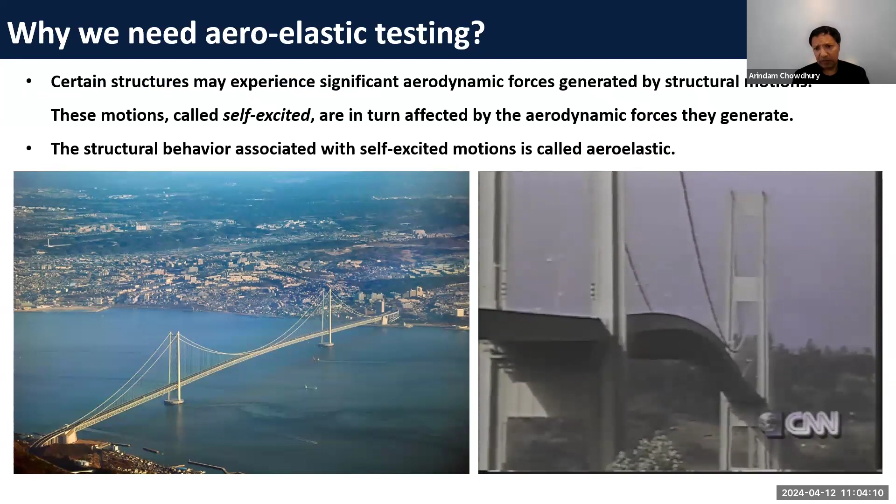My research started with bridge aeroelasticity, so it's relevant to long span bridges, and then the main impact was from the Tacoma Narrows Bridge that actually failed in the video that you can see here. So this failure of the Tacoma Narrows led to a lot of researchers working on bridge aeroelasticity, how the bridge vibrates in wind, and we can model in the wind tunnel test section various degrees of freedom of the bridge under wind loads, and these are some equations that apply to those motions.

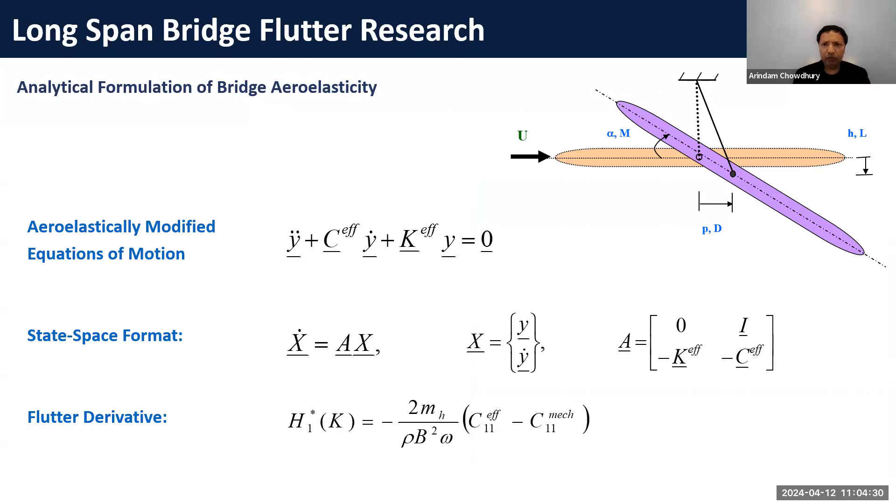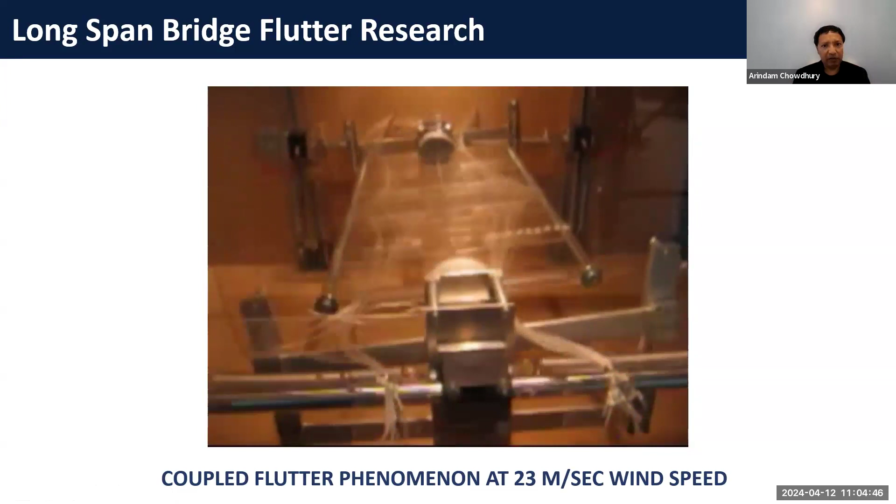From there, in the laboratory, my research was to simulate the actual flutter. As you can see, this is a coupled flutter of a section model of the bridge in the wind tunnel. And we came up with theories that long span bridges can be designed using. So that was my background. Then when I joined Florida International University, I started looking at full-scale and large-scale testing of other types of structures: buildings, bridges, traffic signals, transmission towers.

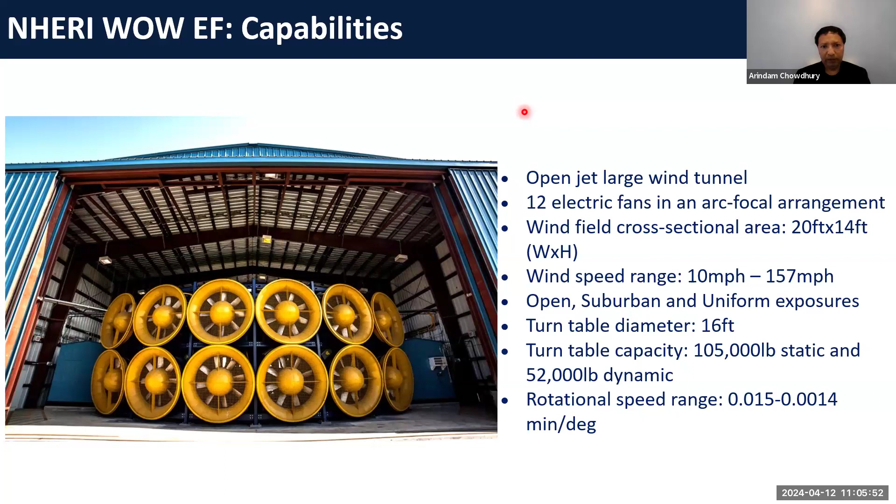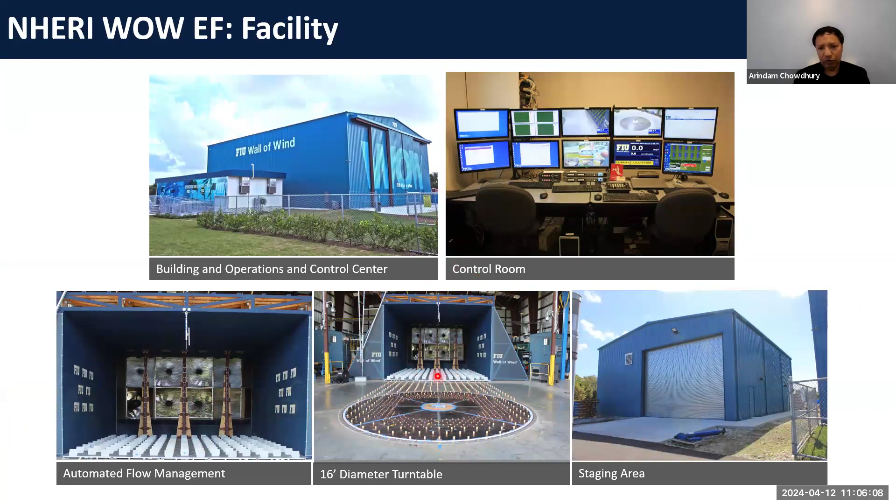And our unique capability is to produce category 5 hurricane wind speeds and test large scale models or even full scale models. So these are various parts of the wind tunnel. We have the control room. We have an atmospheric boundary layer simulation technique using automated roughness on the floor. We have a huge turntable, and we also have a staging area where we can build models. The uniqueness of our facility is that we can do large scale and full scale testing.

Let me see if I can move away from that particular view. I probably have to kind of... Bruno, can you still see my screen? Yes, I can see your screen.

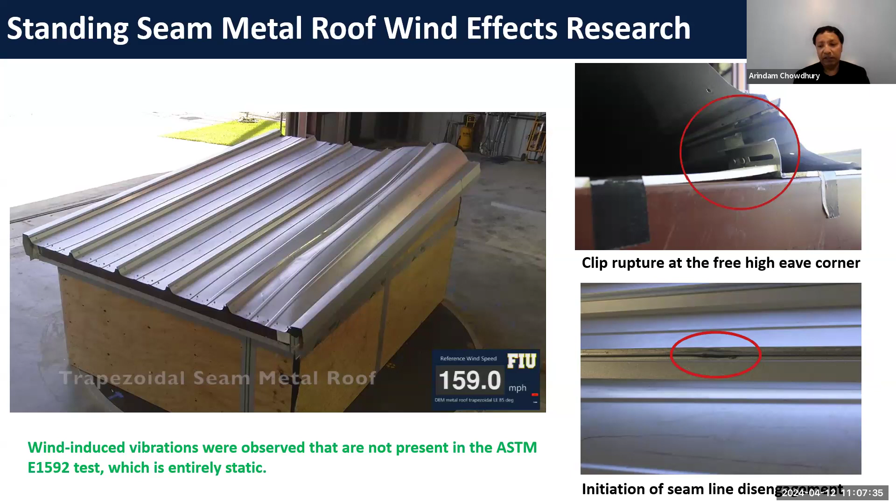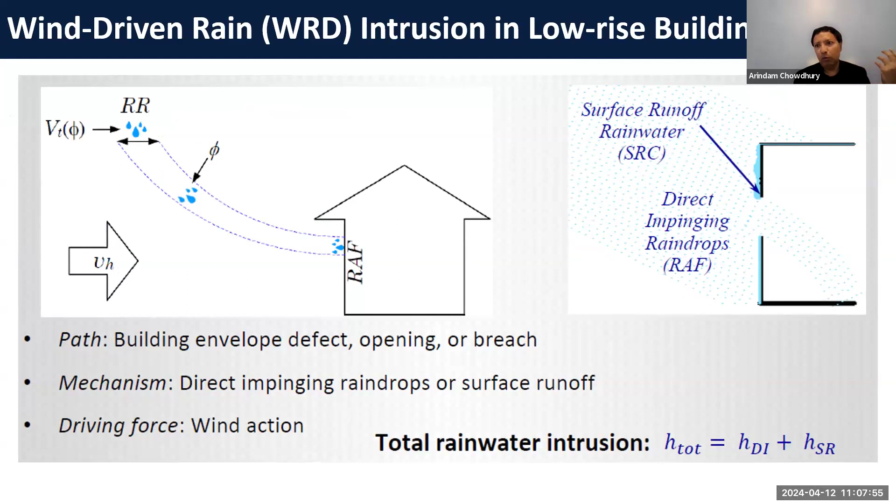So that's the advantage of the Wall of Wind, that we can look at failure modes. We can improve the design. We can also inform the current standards that can be improved using some of these findings. We also know that hurricanes bring a lot of wind-driven rain. And the wind-driven rain has two ways of getting into the building: the direct rain coming, as you can see on the left-hand picture, and then surface runoff, which percolates from the roof or the wall and goes inside a crack or an opening.

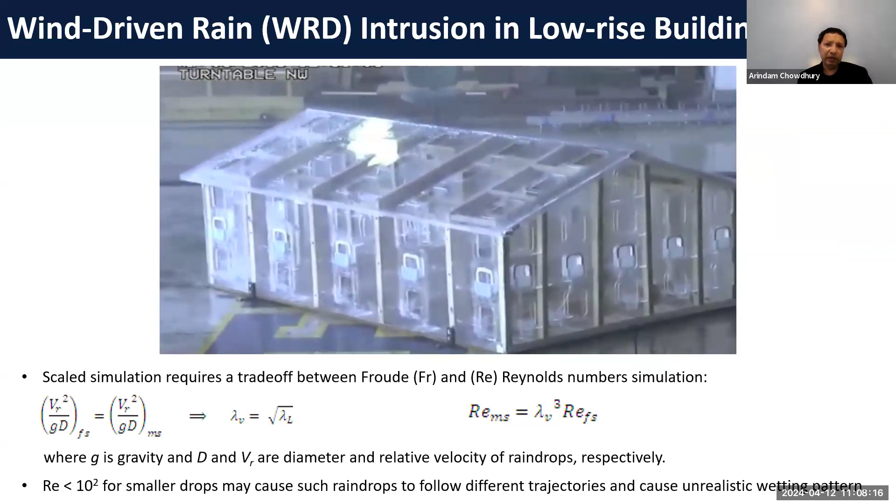So we can simulate all of that at the wall of wind. So this is a simulation of rain on a large-scale model. One of my PhD students graduated with this particular topic, looking at how to scale down rain based on realistic rain measurements in the hurricanes and look at water intrusion. When we get such data, we can come up with various rain intrusion coefficients on the building.

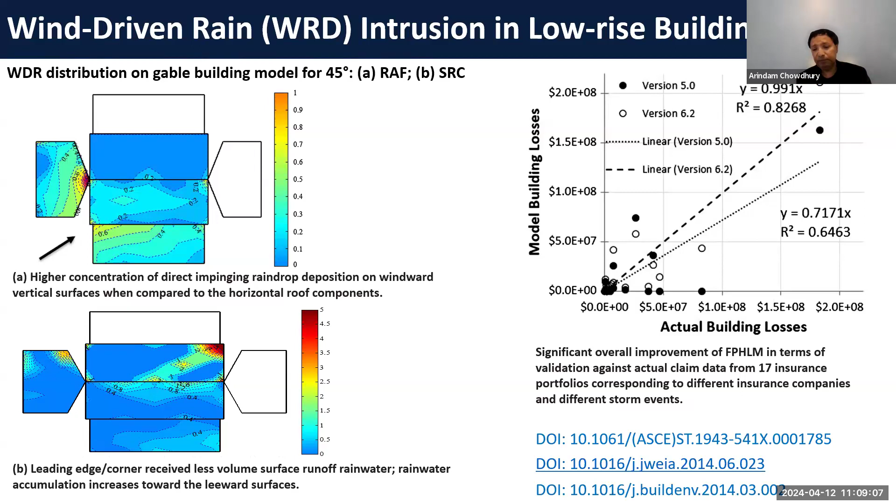And on the right-hand side graph, it shows how using the wall of wind data, there was a significant improvement in matching the simulated risks with the actual losses that they see from the claims. So this was a significant improvement that we did based on testing. There are other things that can be done as well.

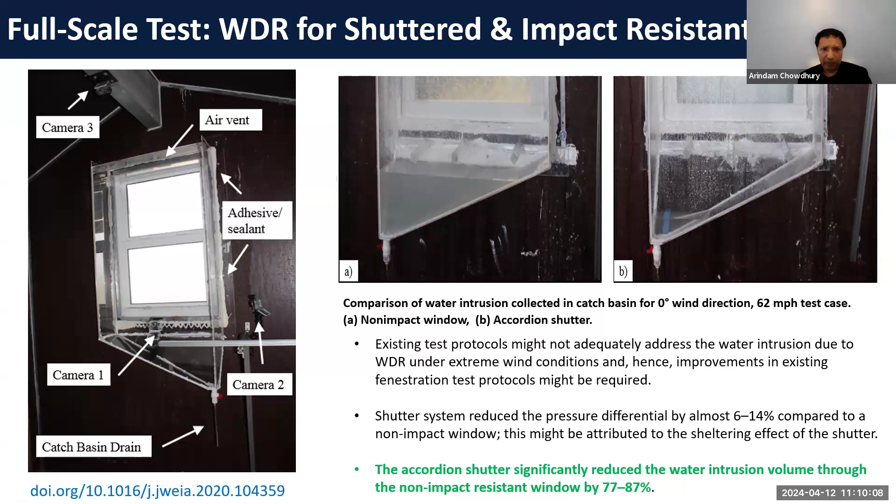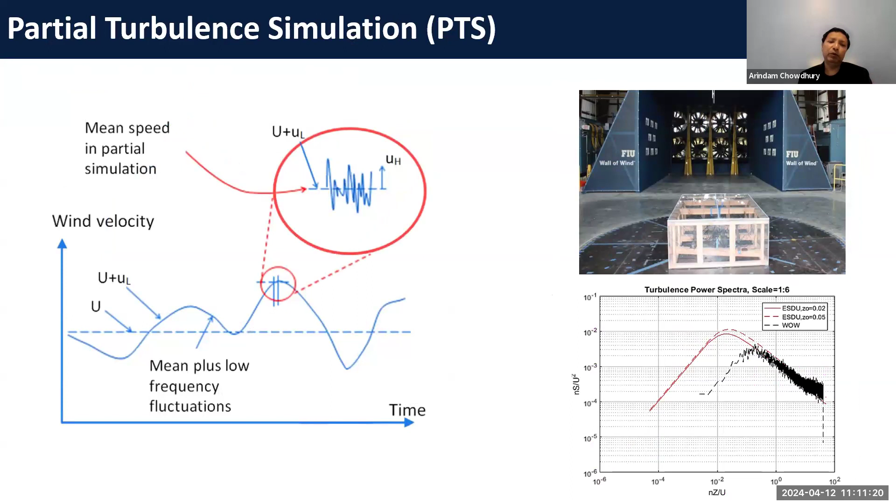So we came up with a method where we can test a larger scale building at the wall of wind and still get good results. It's based on what we call a partial turbulence simulation, and it deals with a lot of statistics. But it can predict pressures that are accurate and very close to the field.

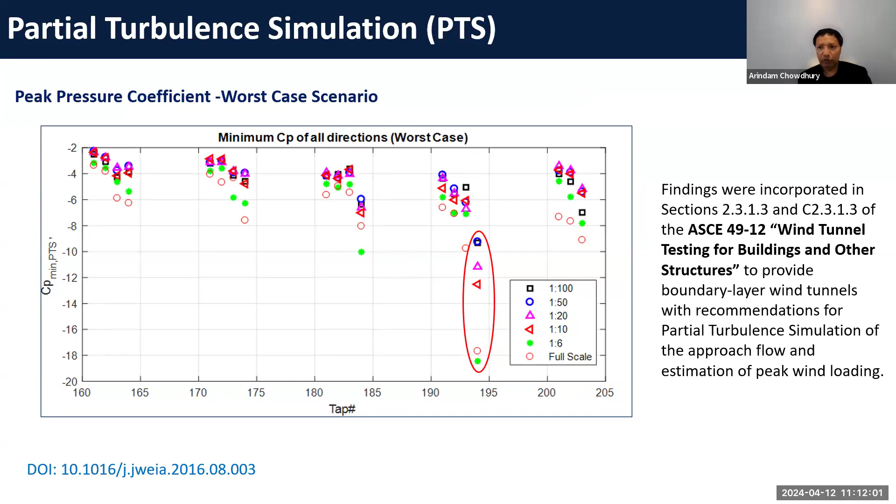And this partial turbulence simulation method went into ASCE 49-12, which is the wind tunnel testing for buildings and other structures. So they have a provision there that calls for such simulation for large scale testing. Once we have these kinds of test methods available, you can do a lot of things.

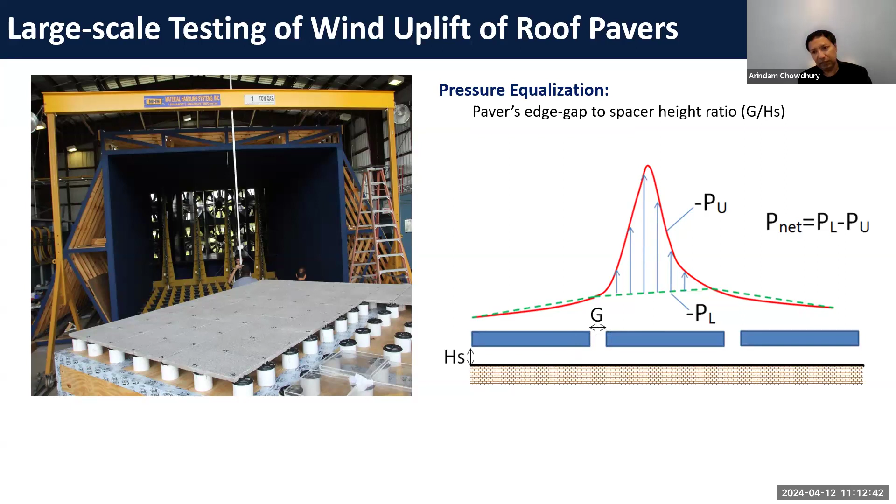For example, this is an example of roof pavers on the roof. These are actual concrete pavers. And you can appreciate that there is a gap between the pavers, and also a gap underneath the pavers. The gap between the pavers on the right picture is called G, and the gap with the roof surface is H. So the ratio G/H determines how the pressures are equalized between the upper surface and the lower surface, and how the vortices behave.

So we plotted various pressure diagrams using the entire paver roof. And we made recommendations that as you increase the G/H ratio, you have less net wind uplift on these pavers. That means your failure wind speed is higher. So we put these recommendations in ASCE 7-22 and ANSI/SPRI RP-4, which has guidelines for pavers.

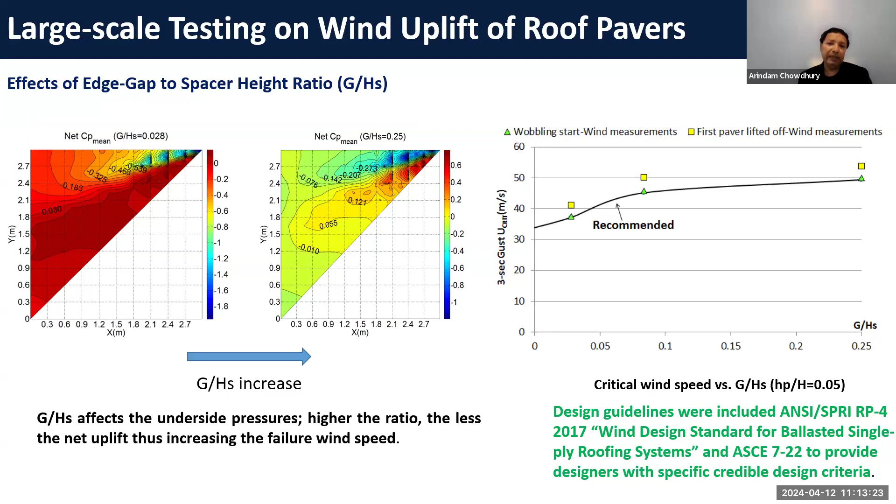But we can see from these kinds of tests that the failure modes can be very different. So we understand the failure mechanisms when we look at this kind of testing. Again, this is an advantage of the Wall of Wind.

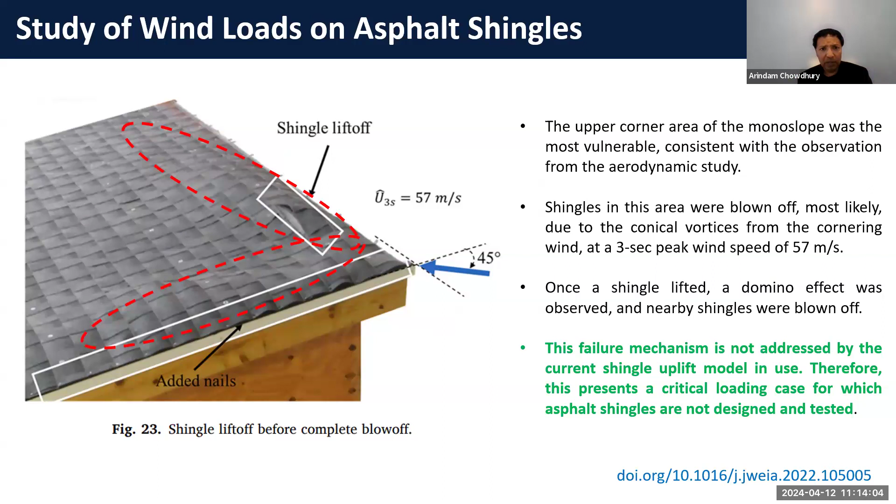But with the smoke, you don't have much flow characterization, but you can have a lot better flow characterization with the actual velocity field on a spatiotemporal scale using the PIV. So any of you who have requirements of understanding fluid-structure interaction and fundamental fluid mechanics can come to our facility and use PIV.

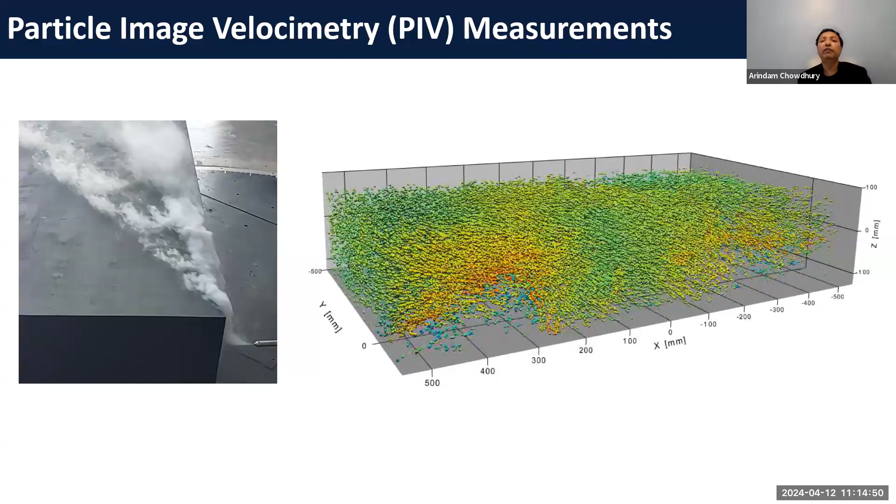At the same time, it's producing wind energy that the building can use during power outages that we have seen in hurricanes. We have seen it in Hurricane Wilma and even Hurricane Irma. So if we can produce power from these things, we can power a house during these power outages.

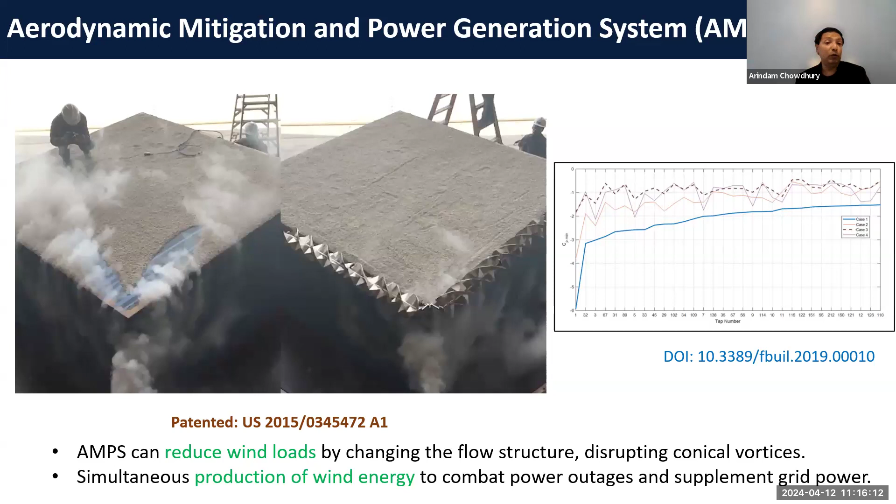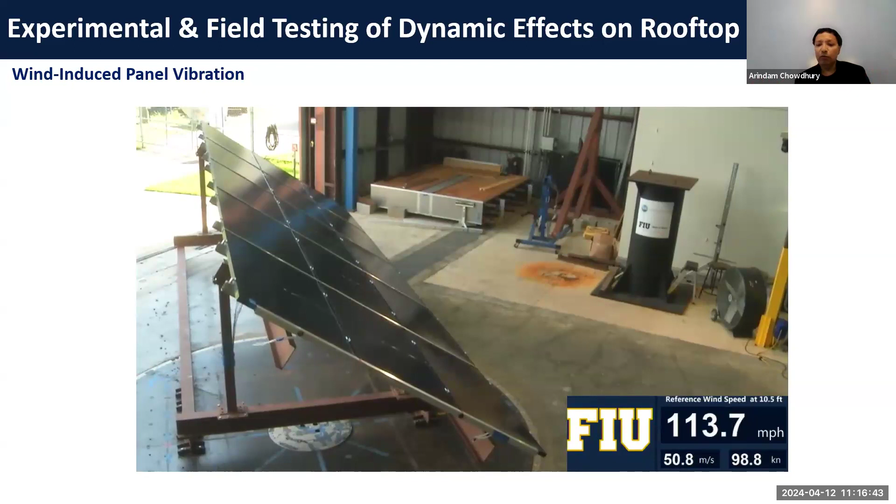We can also do a lot of testing on other renewable energy systems like PV panels. You can see here we are capturing vibrations of some of the PV panels at full scale. And we are coming up with various wind loads related to vibrations of PV panels, which are not really accounted for in many PV structures on the roof. And even the current elevated PV structures, like you see on a carport or on the roof of a building, you have an elevated structure with PV. We don't know the dynamic loads of those. So the Wall of Wind can do that.

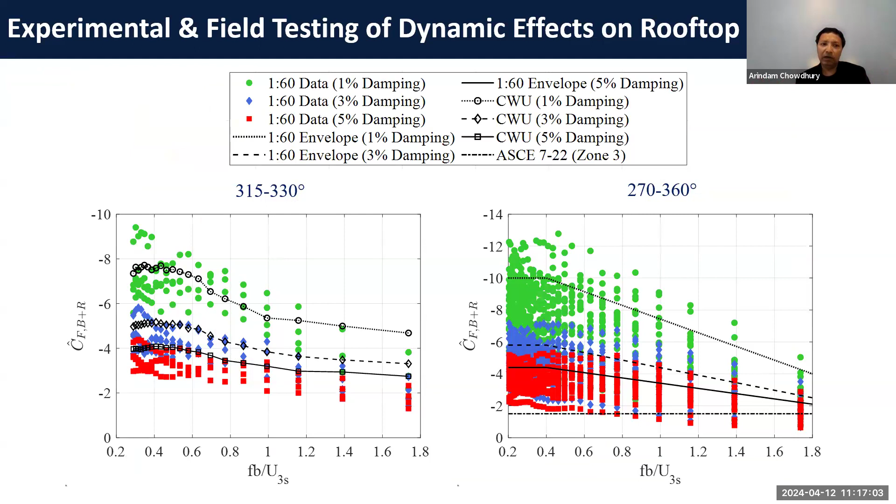These are some of the plots from the testing that we get from the PV panels. Again, you see some of these green dots are over what is in the building code. So again, we can see how much underestimation there is in the current codes, and we can inform those code provisions.

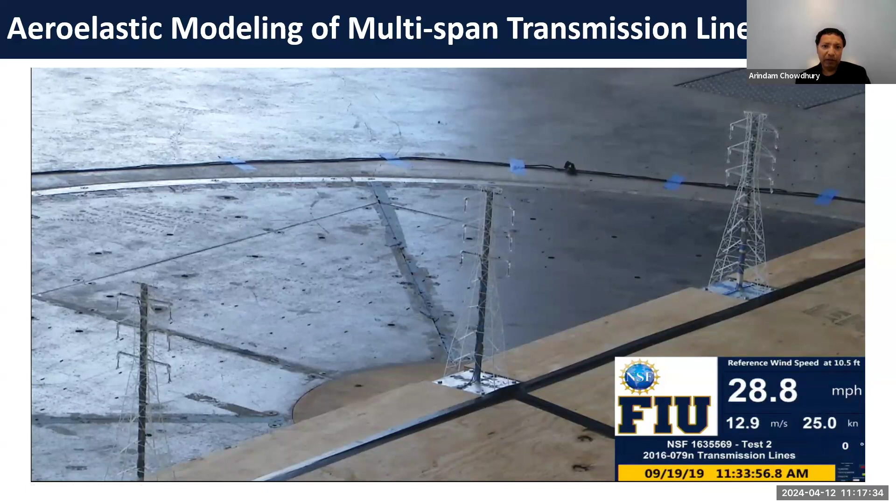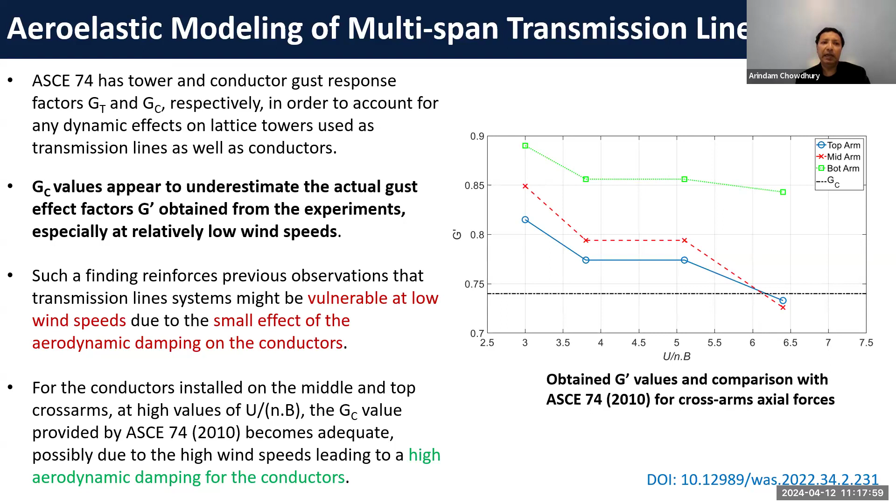And one of the things you can see from the right-hand side picture, the conductor gust factor is about 0.7, but some of the things that we have measured, all the other lines, the green line, are significantly higher. So we are again going to the ASCE 74, which has provisions for the gust effect factor for these kinds of designs of multi-span transmission lines, and we are informing them using this advanced knowledge.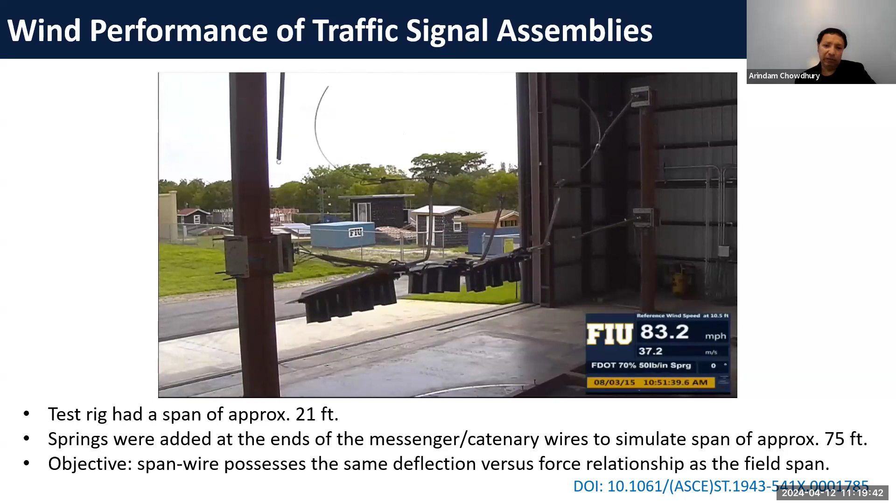And then due to fatigue of these connections, they break. So the full scale is a very nice way of capturing these kinds of instabilities and redesigning these systems, which is not very much possible using scale model results.

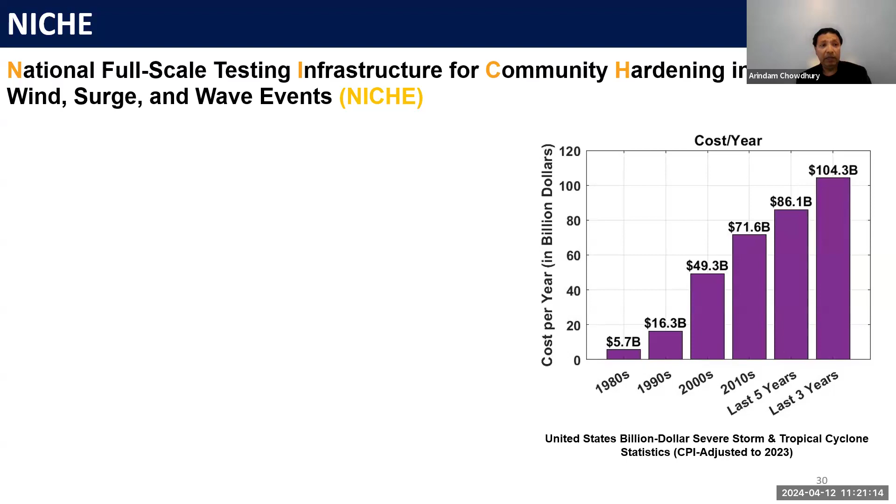So where are we going next? Right now, we can simulate some of the high winds in facilities like Wall of Wind. At the University of Miami, you can do some scale models, wind and water. But there is a lack of a full-scale testing facility that can do wind and water both. So we got a project, about 13 million for the design, which we are calling the National Full-Scale Testing Infrastructure for Community Hardening in Extreme Wind, Surge, and Wave Events, and we call it the NICHE.

So with climate change, as we all know, the hazards are intensifying. The exposure is increasing. 40% of the US population are on the coastlines, and they are right in the threat from these natural hazards. On the graph on the right-hand side, you can see how the losses, cost per year, are escalating. Right now, the average is about 80 billion from windstorms that we lose every year.

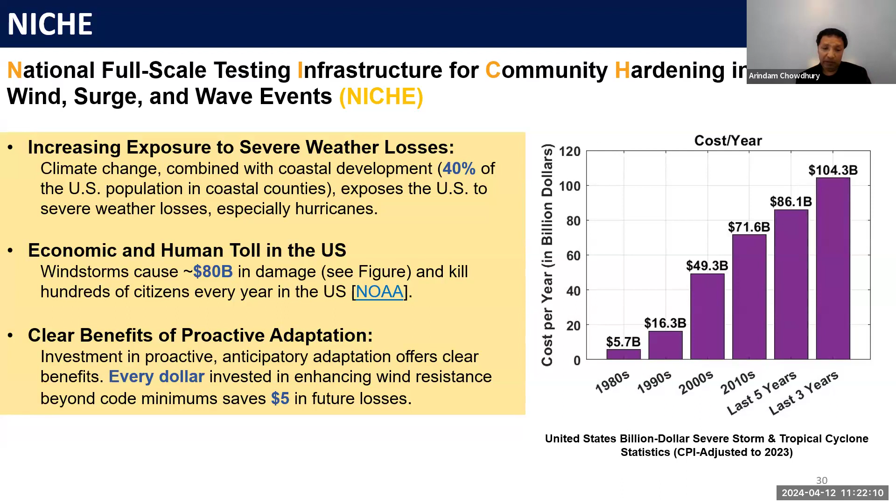So there is a clear benefit that if we can do proactive adaptation, then we can combat climate change impacts. And we know that every dollar invested in the front end can save like $5 in future losses. So that's the motivation. What is lacking? There's no facility right now that can do at large and full scale the things that you see in this picture, right? So coastal resilience is again a key research question here, how to increase coastal resilience.

So the current facility gaps are because of scale model testing. We cannot meet the similarity requirements that we want to. For example, Reynolds number, Froude number, Weber number; it is difficult to simulate all of them the way that we want using smaller scale models. Also, when we test scale models, we cannot do destructive testing. We cannot say, okay, under a particular intensity of wind and storm surge, this is how a coastal elevated house will be impacted. So we want to simulate these high intensity hazards that are anticipated under a changing climate.

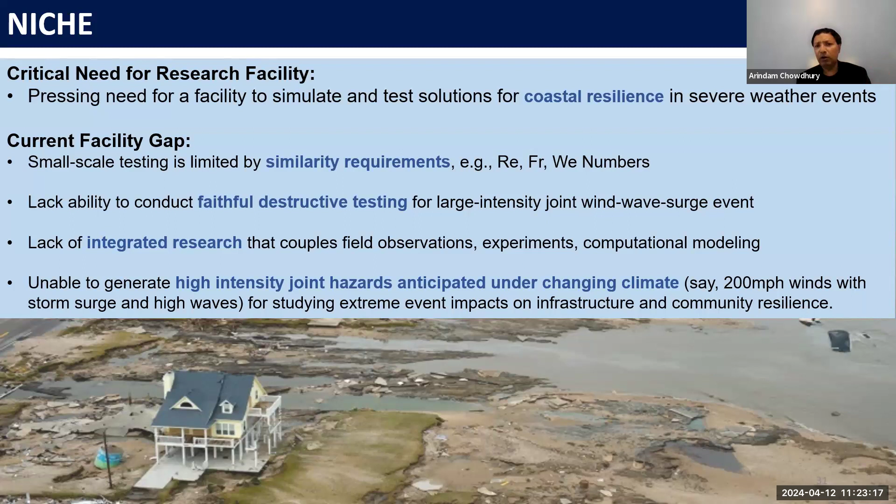And we are going to design this facility with a wind speed of about 200 miles per hour and with wave heights as high as 16 feet. So the goal is to have a full-scale facility that will become a national and even a global research infrastructure that can integrate the notion of convergence. So we are trying to converge disciplines together, for example, wind engineering with coastal engineering.

We are trying to do a methodological convergence. That means we are bringing physical testing, computational simulations, and field data all working together. And institutional convergence in terms of working with various different universities and industry and agencies and stakeholders so that everyone is in the design process and has their input in this design.

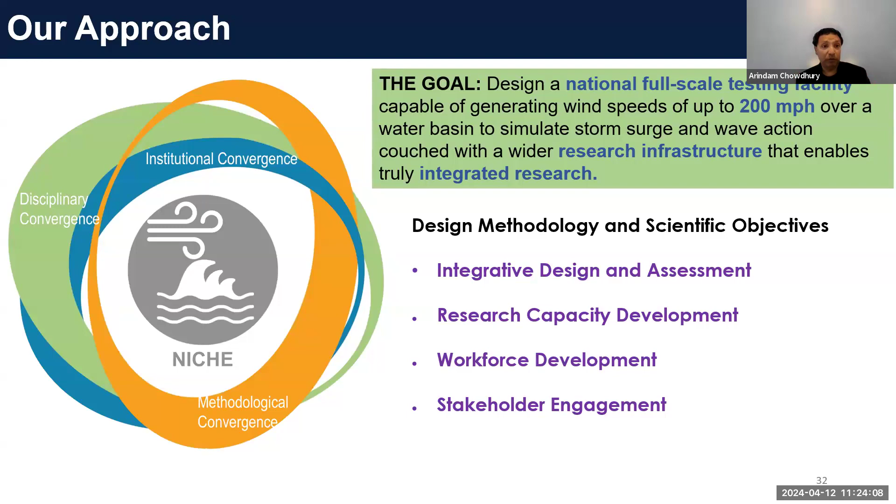We did a lot of landscape studies of what exists around the world. So not only the US, but around the world, what kind of wind and wave facilities exist and what are their scales, what are their capabilities, what are their limitations. Based on that, we selected four facilities in which we are doing testing right now to inform the NICHE design.

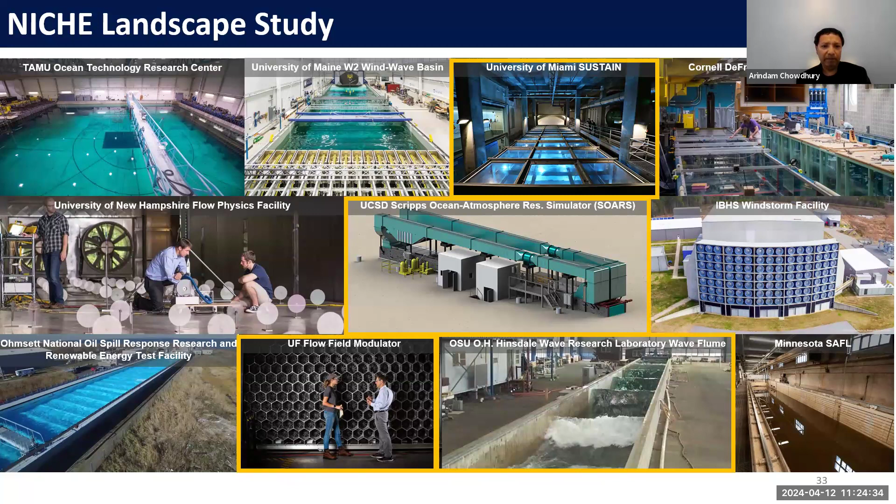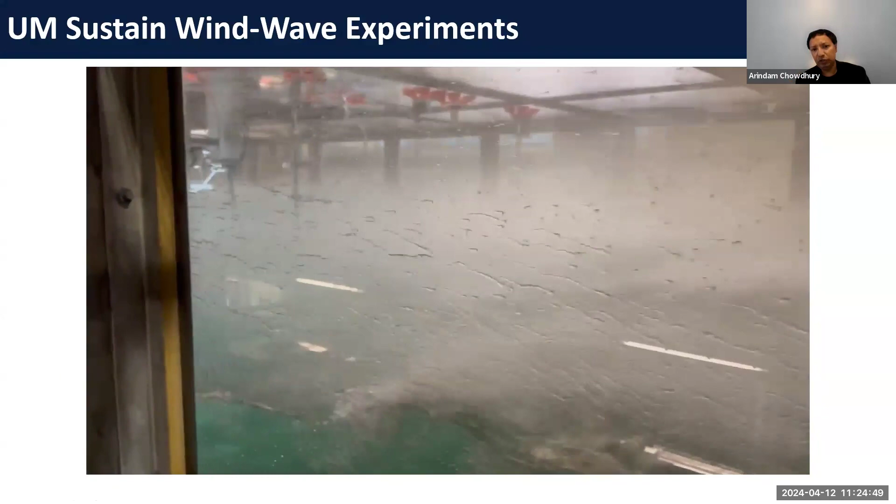One of the facilities is the SUSTAIN facility, and there we are performing experiments. This one, where we are looking at air-sea interaction, we are looking at the effect of sea spray on structures and various other things that are informing the NICHE design. So for the design, what are the research objectives that we want answered, basically, right? That's an important thing for us to understand.

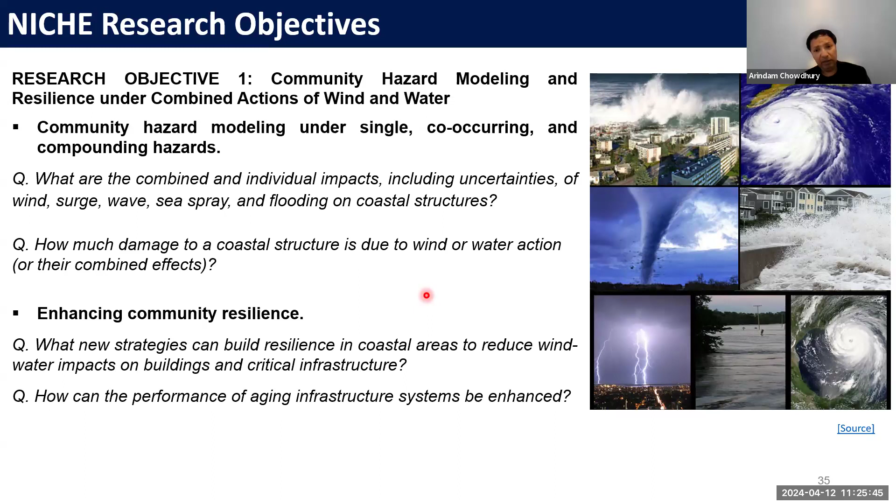What is the effect of aging infrastructure systems and how these things are impacted as they age under different multi-hazard impact? How can you come up with new strategies to increase their resilience? How can we promote public safety and community functionality? Like what methods can we have for saving lives and minimizing the impacts? For example, losing power, losing water, or losing essential elements or the functionality of a building following a hazard event. How to promote recovery, right?

Also, how to enhance computational modeling of multi-phase fluid structure interactions. So now you have wind and wave and the interface at various scales. So how can you improve computational models? Then how can you couple all this information with regional scales? Because things don't happen at a building scale. You have to model the entire community.

So how can we get results from an individual building in the lab and then model what is going to happen to the entire community with similar buildings, and how this is going to inform decisions so that the stakeholders or the emergency managers or the building code can make decisions for residents.

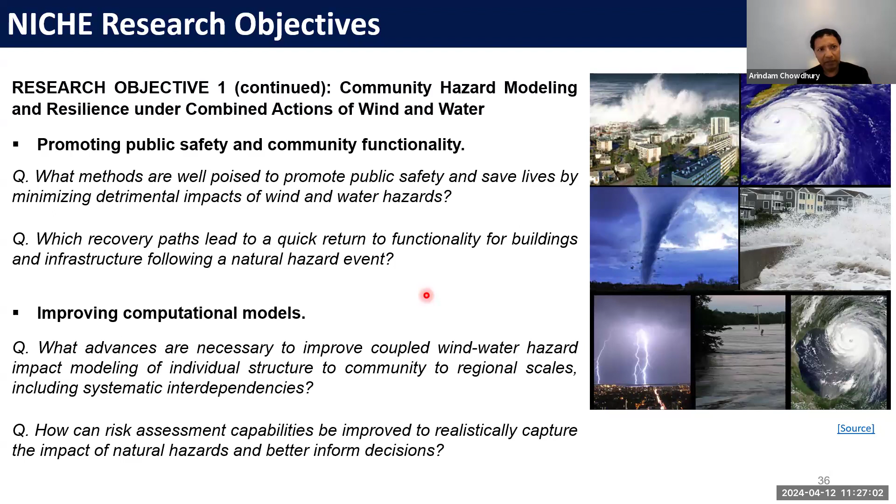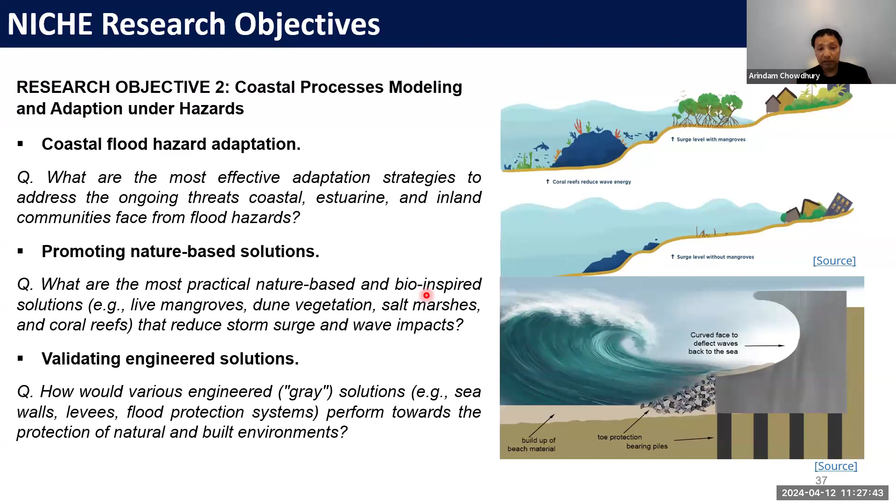The second project objective is closer to what is being done in coastal processes modeling. How can we adapt to flood hazards from hurricanes or from other things? Promoting nature-based solutions like live mangroves, dune vegetation, salt marshes, coral reefs, looking at very unique solutions like the sea hives by Dr. Landolf. How can we test these kind of things at very high scales and with interacting hazards? How can we validate engineered systems like gray solutions, seawalls, levees, flood protection systems at large or full scales to protect natural and built environments?

What is the effect of these kind of processes on sediment transport and erosion and morphological changes? So what is the impact of joint wind surge wave actions on sediment transport, erosion, nearshore and onshore morphologies or morphodynamics, geomechanics? What could be solutions to ensure stability of the coastal structures and foundations, because they are impacted by groundwater processes, morphodynamics, and sediment transport. How to build foundations better?

What is the research that is needed for coastal ecology and oceanography? Again, something that is related to the facility. How can we study more tides, turbulence, upwelling, stratification, and transport, and all these dynamic processes which are very important from a point of fundamental knowledge.

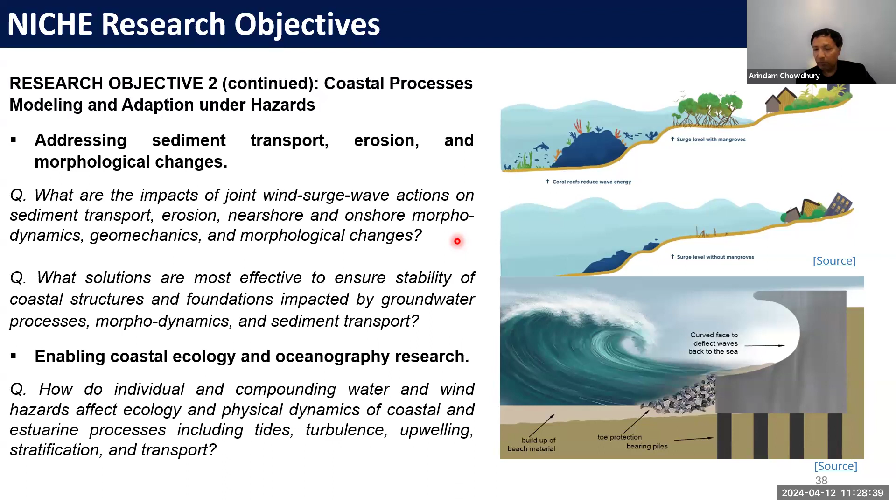And the last research objective is, okay, we are doing everything for today. How are we going to prepare for tomorrow? Adaptation for a changing climate, and how are we going to promote sustainability? So the first thing is modeling evolving hazards. I already told you, under climate change, we are getting stronger hurricanes, wetter hurricanes, slower hurricanes, bigger hurricanes. So how can we simulate the intensity or even the joint probabilities of these intensifying hazards that are coming because of sea level rise, extreme rainfall, extensive flooding, and things that are beyond the new normal?

How do we study impacts of those intensified hazards on our ecosystems and built environment and natural systems and critical infrastructure? What would be the disruptions under these future states of the world? How do we promote climate adaptation, right? We want to produce virtual reality in the facility where people, stakeholders, can come and experience the effects of the climate futures. And based on that, they can come up with climate adaptation policies.

I think experiential decision making is a very important point, as has been studied by social scientists. When you experience something firsthand, there is a high possibility that you're going to move and do some adaptation to that. So we want immersive experimentation in the facility where emergency managers and stakeholders can come and learn. What would be the cost-effective retrofit strategies to avoid threats of future climate-driven hazards, right?

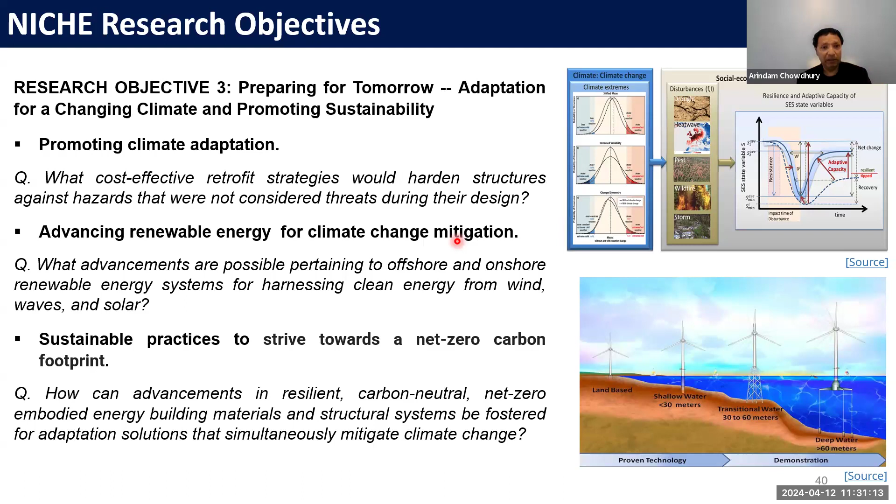And also, how do we fight the non-renewable energy issues and advance renewable energy, harnessing more clean energy from wind, waves, and solar? One of the things that we plan to do is have a huge deep pit in our facility where you can test offshore wind turbines, because they need a much deeper test section. So we want to do that to ensure that we can do research in offshore wind energy. And also we can work with resilient, carbon neutral, net zero embodied energy, new materials, new structural systems that can combat this climate change and reduce the CO2 in the atmosphere.

at full scale. So we are looking at almost 200 miles per hour with a wind test section of 60 feet by 40 feet, probably 20 fans, a water channel that will be maybe 25 feet deep and 500-meter long, with a maximum wave height of 16 feet, testing a two-story building and other infrastructure. The power will be about 80 megawatts. So it's a huge power, and we'll probably need millions of gallons of water for the testing.

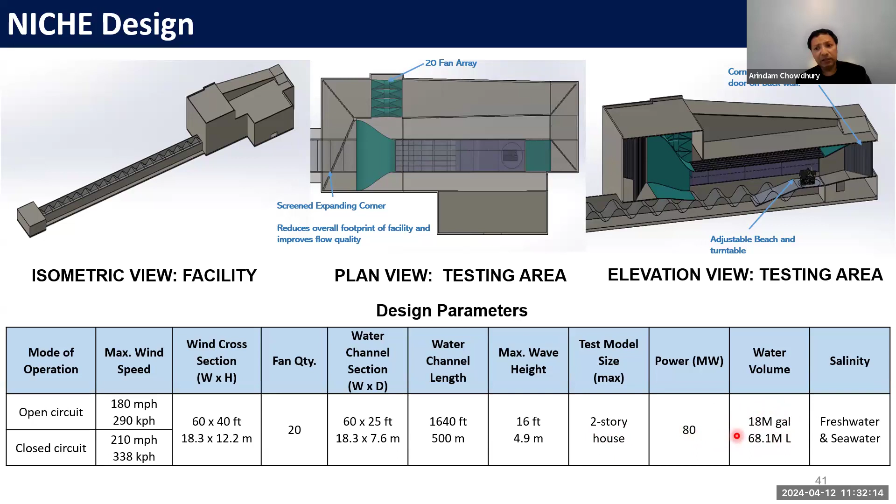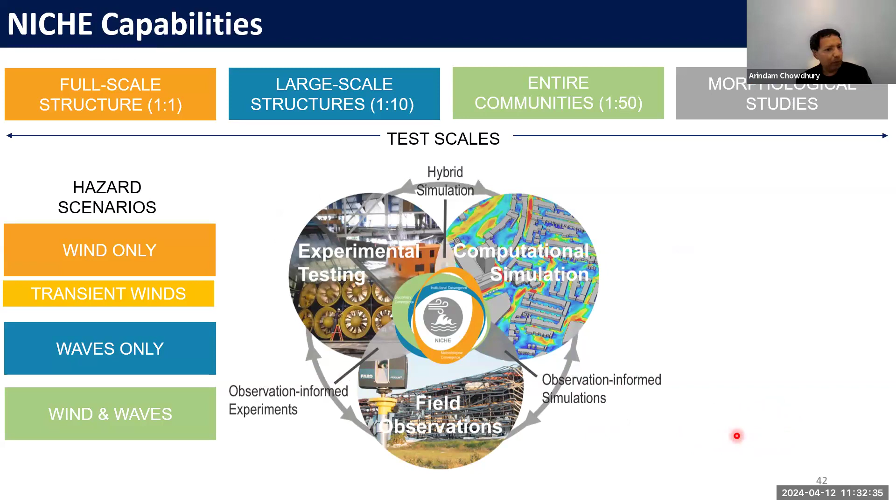Okay. What is the uniqueness that we are going to have with this facility? We are going to first have full-scale structure testing, large-scale structures at 1 to 10 model. We can test entire communities at a reduced scale and morphological studies. We can do wind only, we can do waves only, or we can do combined wind and wave. So we can simulate various hazard scenarios.

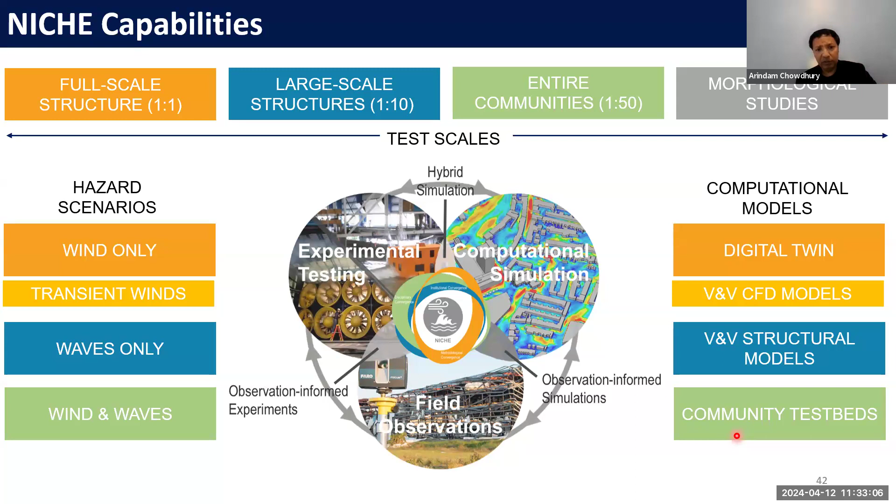And then on the computational side, you can do a digital twin of the facility. You can come up with verification and validation of computational models, verification and validation of structural models, and you can have community test beds that can provide data. Again, it's all in the convergent framework of hybrid simulation, observation-informed simulations, and field, computational and experiment coming all together. So let's go through an example of a convergence approach, right?

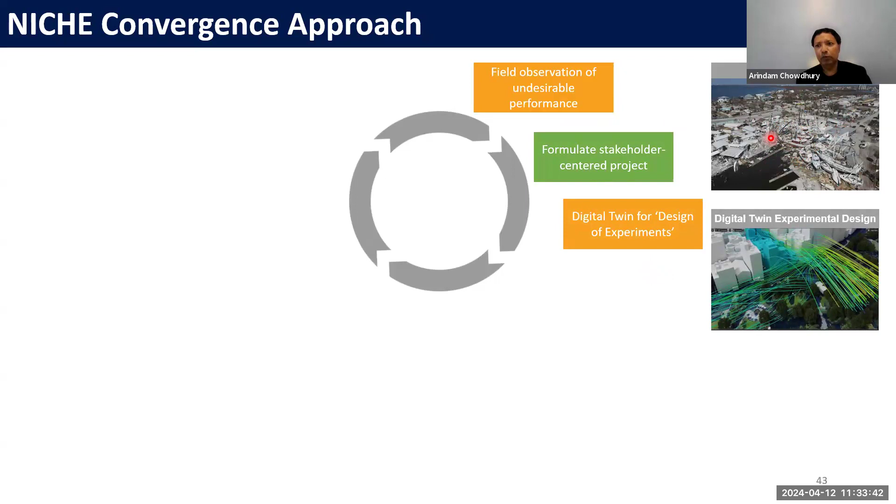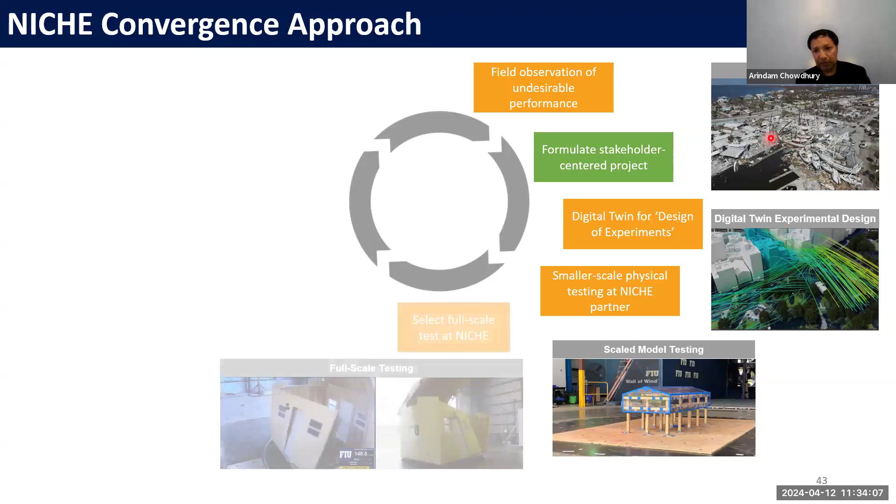Once we have that, it will be very expensive to do everything at the full scale. So we might use facilities like the Wall of Wind facility or other facilities to test a few things at a scaled level to get first-hand knowledge of what are the first three options that are the best. Once we have knowledge on that, then we can move to full-scale testing using the NICHE because it will be expensive and time-consuming. Once we get the full-scale data that we need, we can calibrate our computational models or

regional scale models, whatever we are trying to calibrate, and then we can upscale that computational model to model the entire community or to regional-based simulation. And from that, we can understand what are the social and economic impacts of various interventions. And finally, we produce the results to the stakeholder, and they can implement expeditiously. And in a future hurricane scenario, we can have better results or better resilience of the community. So this is an example of how we can promote convergence research using various tools.

The broader impact: this aligns with the NSF's big ideas, because the big ideas are convergence research, one, and the other one is mid-scale infrastructure, MSRI, which are the big telescopes, ships and other kinds of things that you see, which are huge investments of NSF. So we are aligned with that. We will definitely maintain a US competitive advantage if we build this in the US over other countries. And we can inform them even for their community resilience.

We will protect lives and enhance the quality of life. We'll strengthen the national security and economy. And then there will be research translations for practitioners and policymakers, new products, new patents, new provisions. And finally, integrated workforce development.